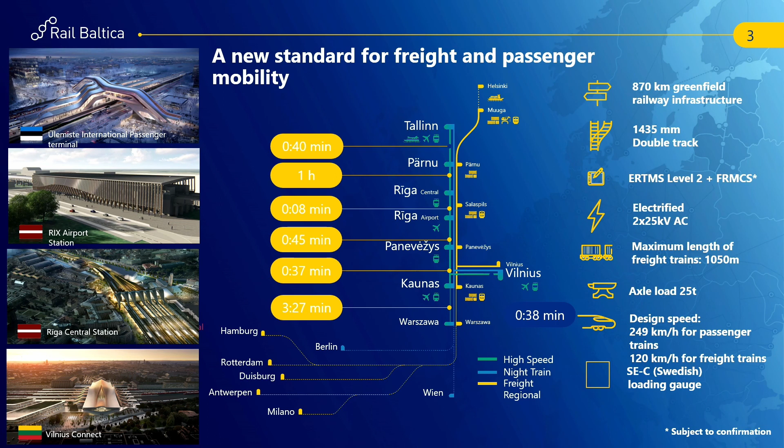Right now, our global project is in the master design for priority stage, which is nearing completion. We can assume our project has reached the maturity level where we are receiving 3D data. The previous speaker, Philip, already mentioned a lot about 3D data and how we are using it, and I will explain a few more details later.

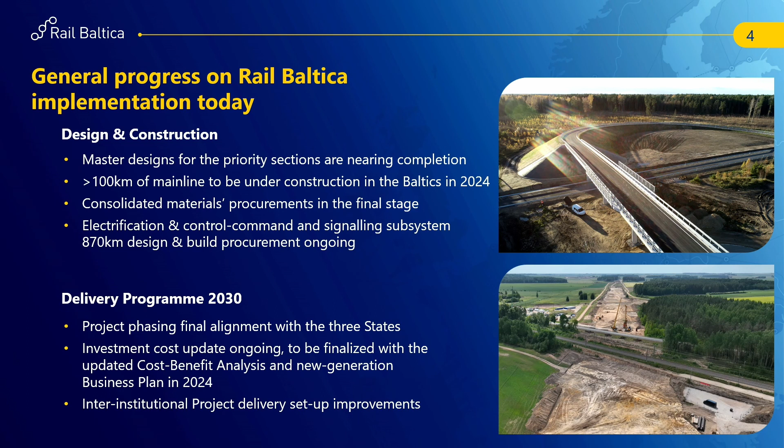Currently, we expect that this year more than 100 kilometers will be under construction across the Baltic countries. Right now there's a final stage for the consolidated material procurement, one of the largest procurements in the Baltic countries, meaning there's one procurement for all three countries for delivering those construction materials. Also, the electrification, control, command, and signaling subsystems for the whole mainline have an ongoing procurement.

Regarding the delivery program 2030, maybe some of you have heard of it, the project is phasing final alignments with all three states, still ongoing, and hopefully will be aligned soon. Investment cost updates are ongoing and expected to be finalized this year, as well as cost-benefit analysis and the new generation business plan. Interinstitutional project delivery setup improvements are also happening at the moment.

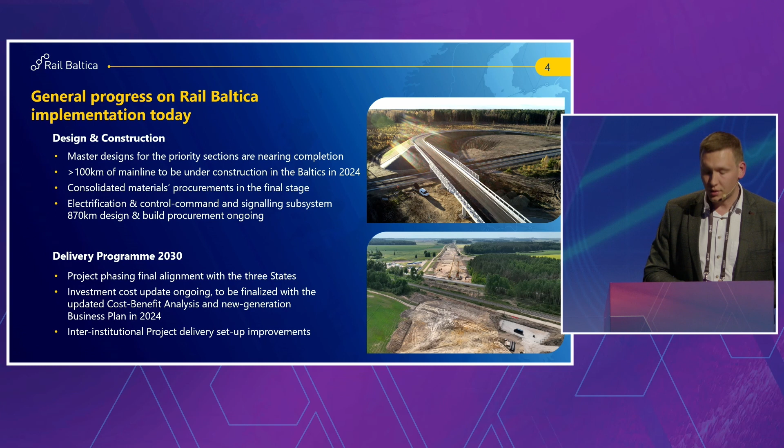In our GIS team or department, we are involved in 4 priorities of our global project. Overall there are more priorities, but today I would like to focus on 4 where our involvement is quite significant. First is design and planning, probably the most obvious topic. Then construction works. Third is railway subsystem development. And last but not least is securing of finances.

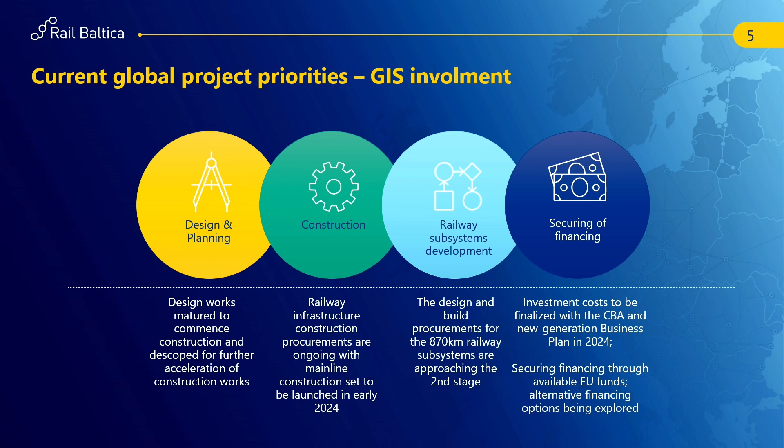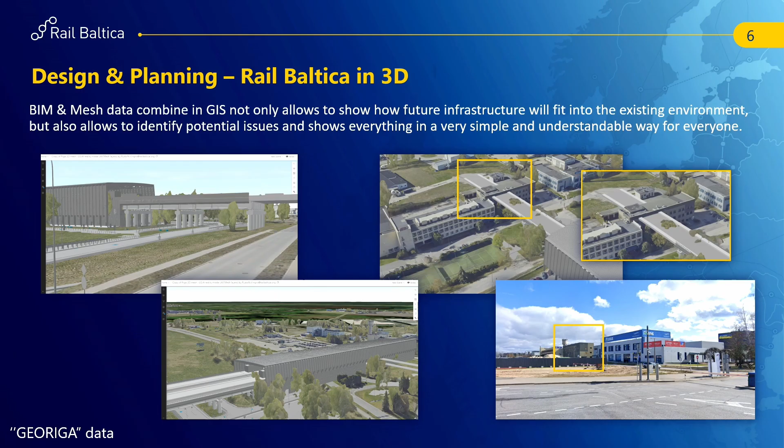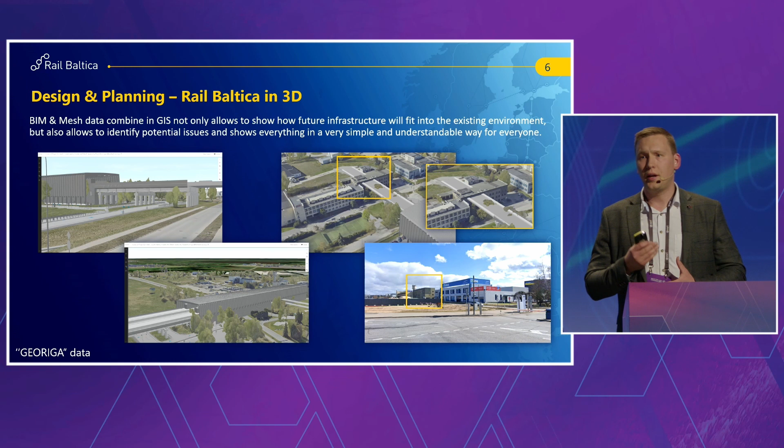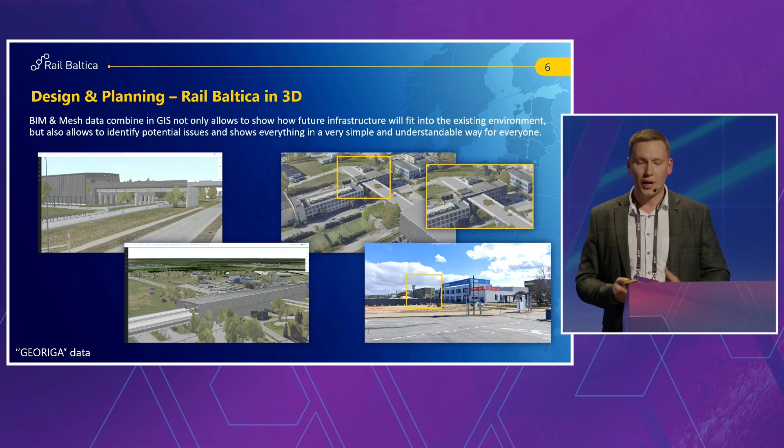As Philip mentioned previously about 3D data and model usage in our project, we are gathering together all this 3D data and putting all those design files into one database, which we call the single source of truth. This task is very important, not only for putting together all this information, but by having a single source of truth database, we can provide the same information in a user-friendly environment for colleagues who are probably not technical experts and don't use advanced BIM software. Therefore, nice visualizations and a user-friendly environment such as GIS is very useful for creating better understanding in our project.

As you can see in this picture, I would like to add that those who are not using BIM software can very easily use our GIS platform to review clash errors between interfaces or different deliverables or 3D files.

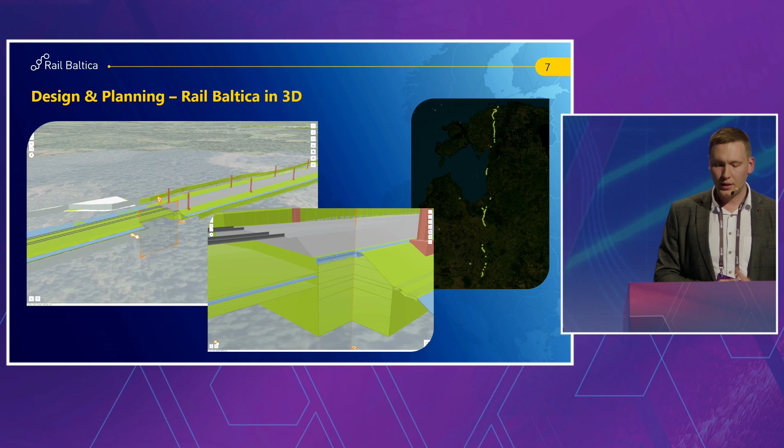Our mainline is 870 kilometers, split into many sections, and right now I don't remember exactly how many, but all those files are delivered separately and we have to put everything together. Reviewing them one by one can be quite hard and difficult, so we have this one common platform. On the picture to your right, you can see our progress processing all that 3D data. Right now approximately 50% of our mainline is covered with 3D data, which in my opinion is quite a good result.

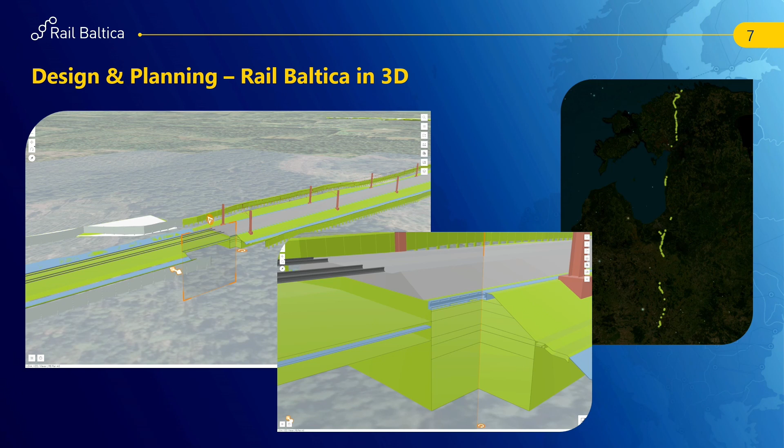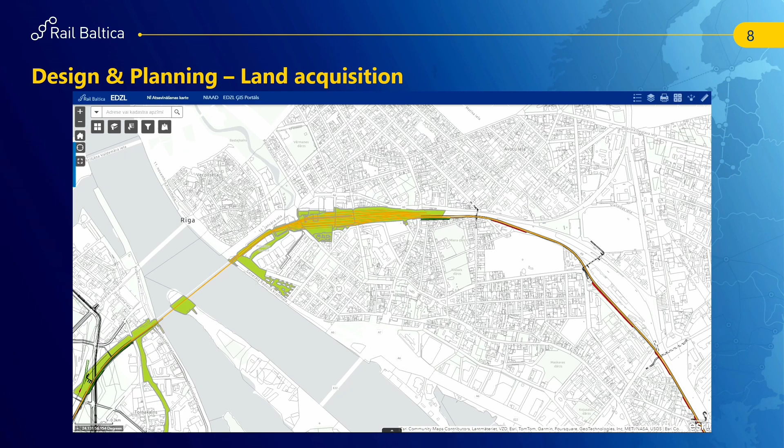Of course, no one has rejected or canceled the 2D data. Right now on the screen you can see a screenshot from one project we did together with the Latvian implementing body Eiropas dzelzceļa līnijas, who are performing a very important task dealing with land acquisition. This is a two-enterprise collaboration, showing how we can integrate two completely different systems and, out of both systems, create one good visualization.

This project is very important for both enterprises, so they can do their daily work in their own systems, but as project coordinator, we can track the status of acquired land plots and whether those land plots are available for construction works, because without available land we cannot build anything.

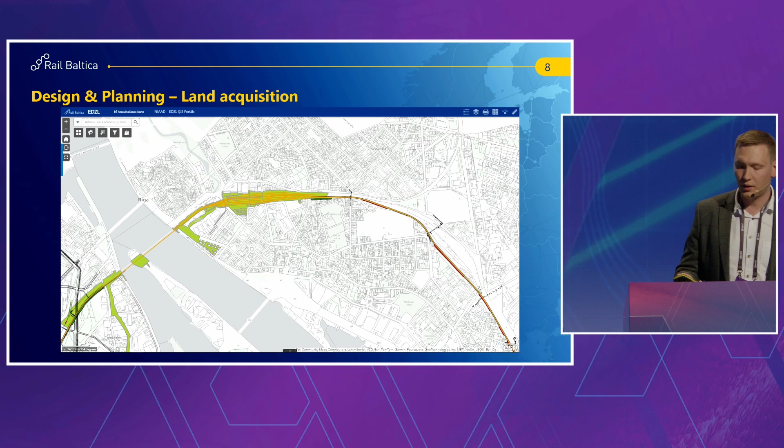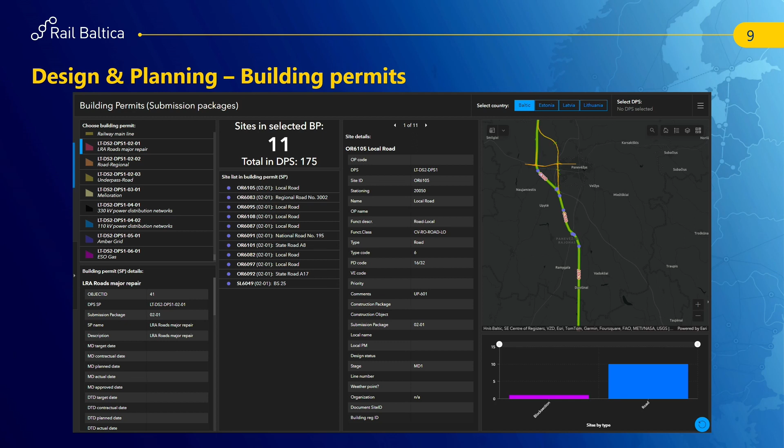Of course, we are also interested in building permits, which sometimes refer to the submission packages we receive from the designers, and not only for the technical teams but also for project planners, financial teams and others. It's very important to know what kind of building permits or submission packages we are receiving and what kind of construction objects fall within this area.

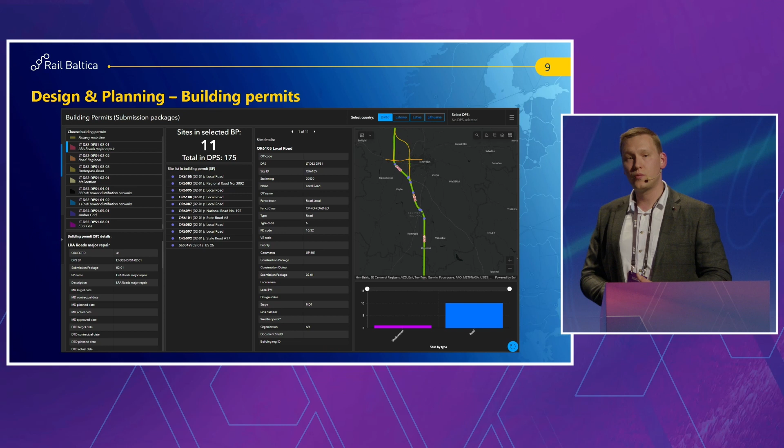For building permits we use regular polygons which describe the approximate area where those construction objects are located, and with such simple dashboards we can track very important information.

Quite recently we started working on one very hot topic for ourselves. Together with our transport economists, we are developing transport demand models, where transport economists do their math, calculating the volumes of cargo and estimating passenger flow on each section, while GIS helps provide a platform for visualization of the geospatial objects, because all this mathematics has to be shown somewhere, and the results should be accessible in a very easy, understandable and user-friendly way.

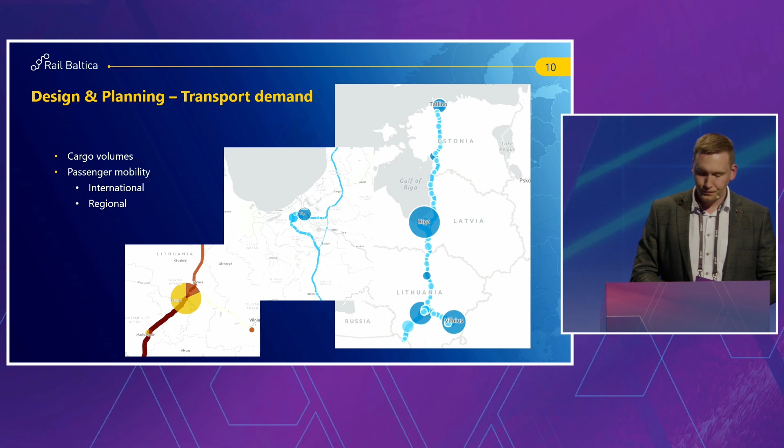And of course, those projects I mentioned are not the only ones. We have dozens of projects regarding design or planning which help our colleagues do their daily tasks.

We have geodesy maps where we have all three Baltic countries' geodesy networks at once, so our colleagues can estimate and plan approximate locations for new local geodetic networks. We also have logistics maps where our logistics colleagues plan where construction materials will be stored and how they will be delivered to the construction sites.

Paper maps are still common in the 21st century. We make them for presentation materials, and in every room in our office we have paper maps, and it looks like they will be required in the coming years as well. Quite recently we released an updated version of our public map, available on our homepage, railbaltica.org. You are very welcome to visit this homepage and check it out.

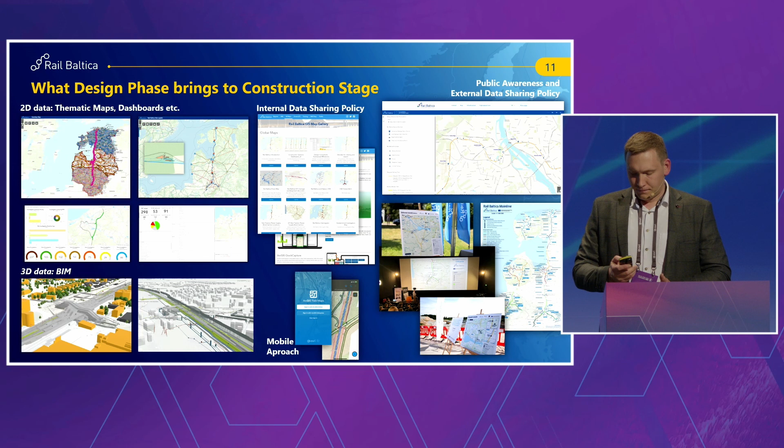Right now, as I mentioned, we have reached this maturity level in the project where we are moving from design to the construction stage. As an enterprise, we are not obliged to perform construction supervision tasks, but we are setting some requirements, and it's very important that we can use and work with this construction supervision data.

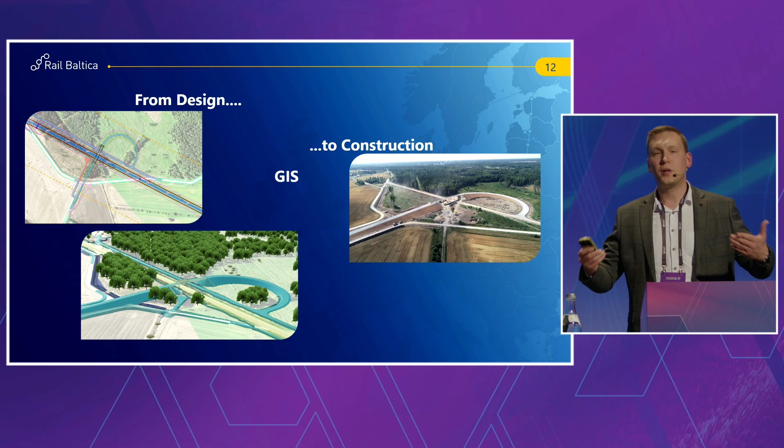Therefore, we are investigating and testing several options: how can we process, in the most efficient and best way, 3D LiDAR data, orthophotos, 3D models, and how we can combine it together, because this data amount for all this mainline is huge, and it takes a lot of resources, both human resources and technical ones. So this is also one topic we are working on regarding the construction works.

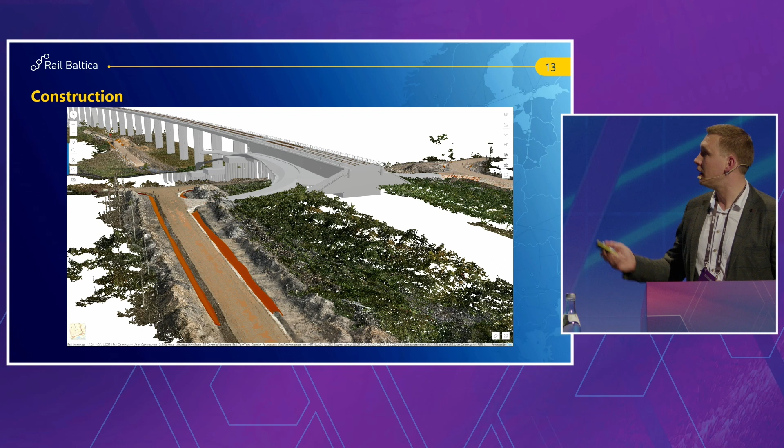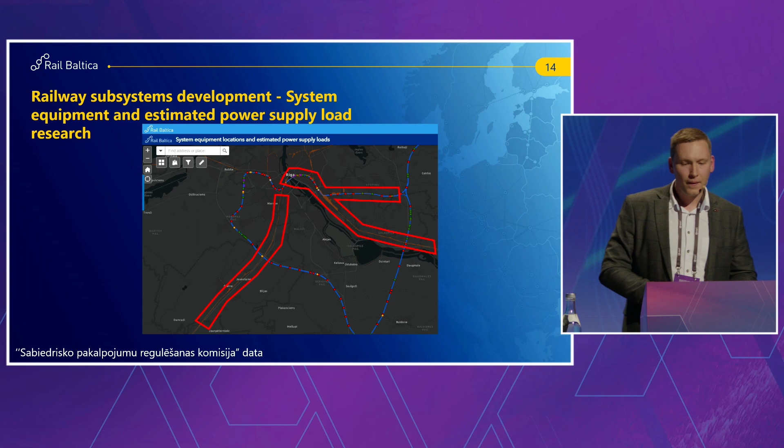And of course, regarding the finances, in most cases people think of information that cannot be located on the map, but actually finances, like other data, could be quite easily located, and it also has some kind of geospatial component. Quite recently we started to work on different maps which represent financial information.

First of all, we are receiving European money, like European fund money. In this case we are talking about the CEF finance. We have to locate it on the maps, and this also goes as a report, an attachment to the reports where we show in which section we are spending this money, how much, and what kind of objects we are building for that money. And also the estimated capex information — this is what we are working on, trying to visualize on the map where exactly this money is going.

As well as project complexity, because even Rail Baltica is a mega project. Some parts are more difficult to build and manage, and some parts are a little bit easier. That's why it's important to have this vision of the complexity in different sections.

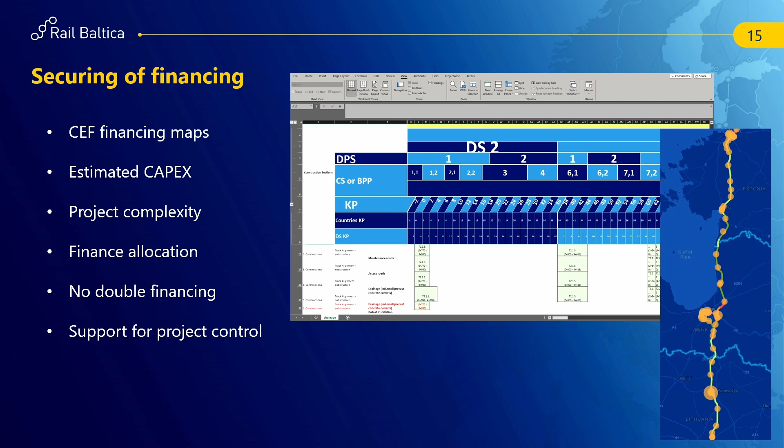And of course, as I mentioned, finance allocation is important. But why is it important? It's important that we are avoiding double financing. Europe is also tracking that we are not spending or applying for several grants or funds to do the same task twice. To avoid that, we try to check it before submitting those finance requests to the European Union, and we try to eliminate all the errors and possibilities before we apply.

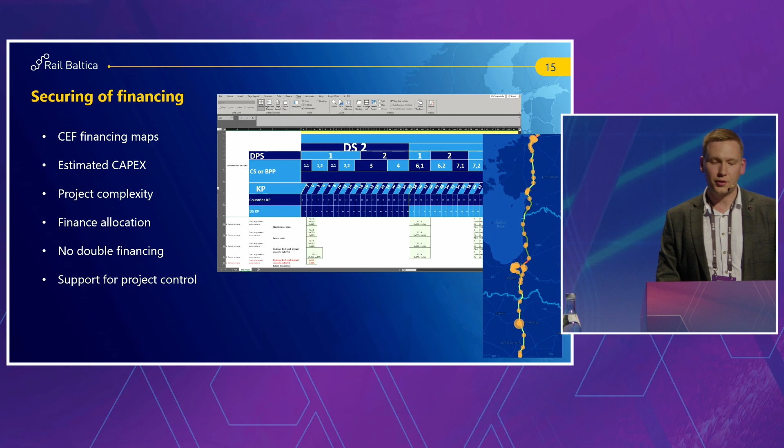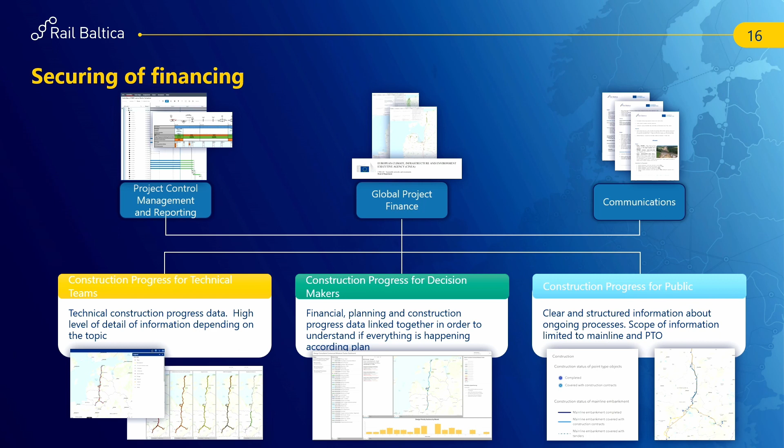On the other side, we have different teams who are working with that data, those matters, questions and topics. We as GIS meet somewhere in the middle, because we are not only showing and visualizing the data that we have, but we are also supporting our colleagues to set the correct requirements for the databases or for the technical questions. As GIS, we connect all those parties together, making our project more efficient by saving money and similar benefits.

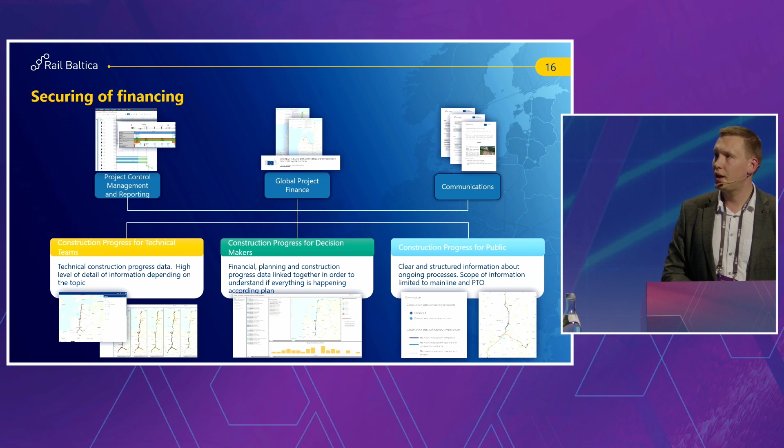In a nutshell, that's it. Thank you for your attention.